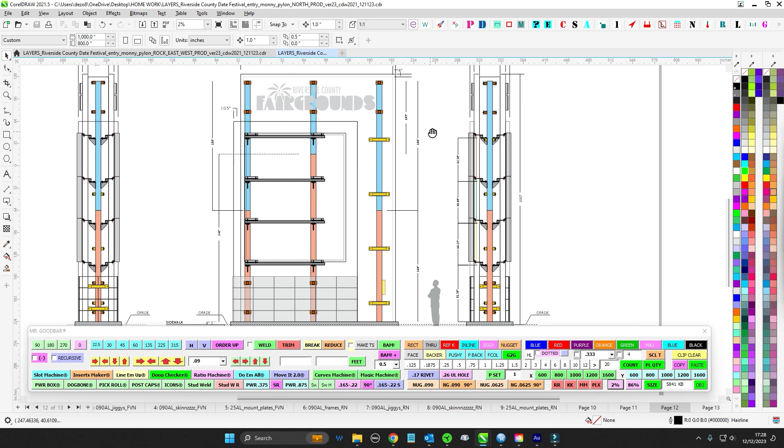It's going to be the fairgrounds, broken up into several chunks. The main thing to know is that we've got some stonework on the bottom, and it's going to be broken up into the major boxes.

So what I've got here is the OG, the old busted version. You can see where this is going away, and we're going to be adding - you can see where the blue is. We're adding more posts there, and the tan, peachish color is the existing poles, you can see where they fit in. So it's going to become quite large.

So what I wanted to do is just give you the lay of the land.

Right now this is 111. 111 is laid out almost perfectly east-west. So what you've got here is the north side, facing Yucca. This side facing this way is going to be facing west - this is the west side face, facing Palm Springs. The other side is the east, facing Arizona, and then the south.

Now there really isn't anything on the south other than access doors. On this pole is where the electrical already is, so they're going to keep that, but we're just extending the pole up, keeping all the stuff there for the new displays and everything. So just keep in mind what I'm calling out and what faces which way.

North faces the street, south faces the parking lot or entrance, and west faces this way. I pretty much started on the west - that was what was given to me. So organically, this is the west side that faces. So that's the layout of how this is all laid out and which way faces what - more for install, but you guys can keep in mind what it looks like over there.

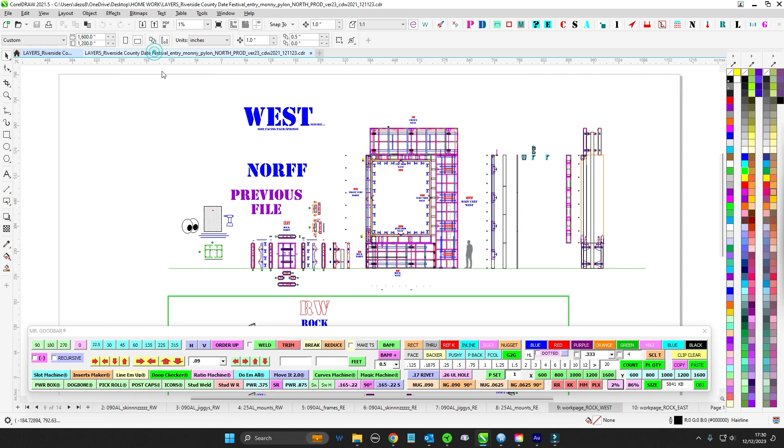So let's show you where we're starting. We have basically a surround that's going around the TV screens, and then it's just going to be panels here, and then there's stonework down at the bottom - well, I'm calling it rock. It's going to be cultured stone, but I just call it rock because 'S' gets confusing, so I call it 'R'.

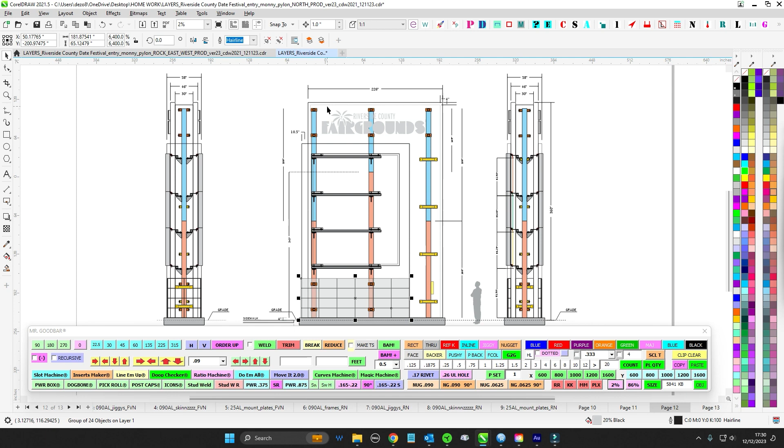So there's rock down here, and then there's the surround, and then there's the panels, and then there's the letters. You can see the side views and stuff like that. So that's where this kind of started.

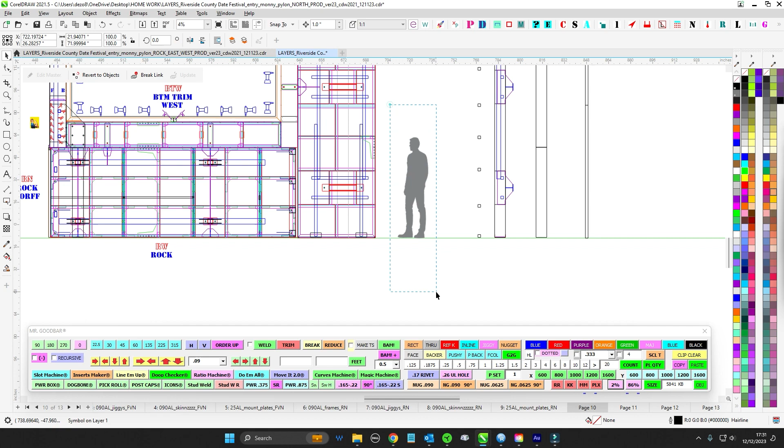And then I realized that I'm at 1800 right now - 1800 inches is the maximum file size you can use at 1-to-1 scale in Corel. So I quickly realized that - yes, you can see, Harold or Hank, whatever his name is - this thing's pretty big.

So what I did is I broke it apart into 14 different sections - 8 of those are essentially monument signs that are really skinny, and 6 of those are cabinets that create that surround. So I'll show you how it's laid out, so you can get an idea what's up. The top panel, I'm going to call that the crown.

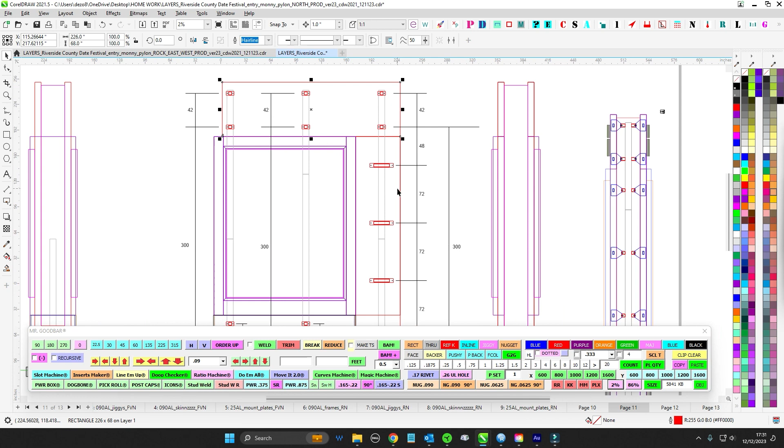And then there's the east and west, because there's one facing this way and one facing that way. There's the main vertical here that runs all the way down. There's 2 of those. And then I'm calling these, like I said, the rock. You have the front facing rock, and then you have the east and the west rock. Those are 3 panels that wrap. And then you have this one here is the main panel.

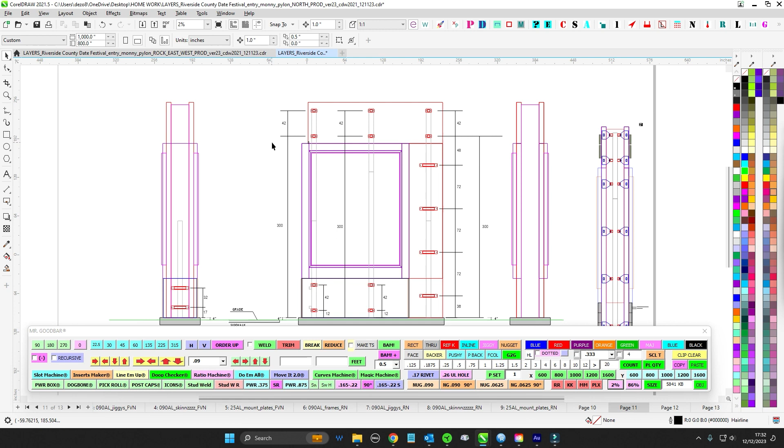This is called the front vertical north or something like that, I forget. But anyway, so that right there makes up the whole front of the sign, and it kind of ties in the surrounds. Then you're left with basically 6 boxes, 3 per side, little cabinets. And those will be like the surround that surrounds the TV screen area. So this is where the screens are.

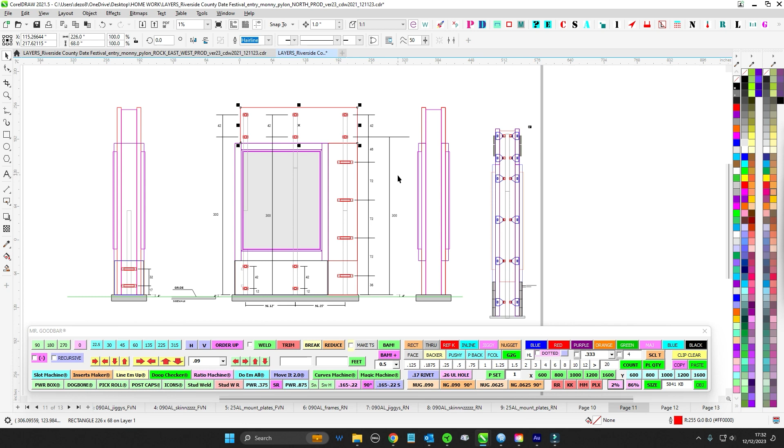So other than the fact that all of these need to connect to each other, that's really the challenge. But if I were to give you essentially 8 monument signs that are pretty skinny and only have faces on one side, you'd be like, cool, I know you guys can knock these out. You guys can knock a monument sign out before lunch if you're hopping. So as far as being intimidated by how big the sign is, really you're just going to be cranking out a lot of cabinets, and you guys are really good at that.

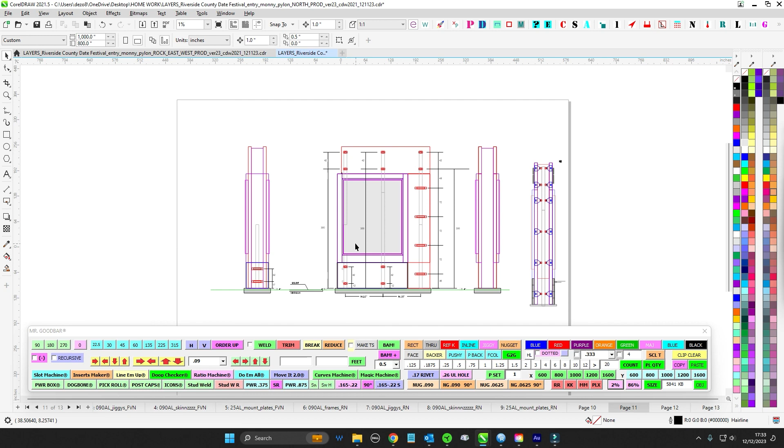And then you're going to have these 6 little skinny cabinets, and these won't even have jigs. We're going to go jigless design on that just to make it easy, keep it lightweight. But I mean, this right here is over 12 feet, so it's still big. This is going to be 16 feet, whatever it is. So it's just the scope, it's just the size of things. That's all.

So anyway, that way you kind of get an idea. Let's go ahead and take a look at that. So like I said, we got crown, so I'm calling that CW. I'm going to break this cabinet here into crown, west and east. I'm calling this the main vert west, so that's going to be this whole guy here. You're going to build this into one big old panel there.

And then, like I said, I've got the rock west, which is this guy, and the rock east. Those I've already sent. And then you have the rock north, which is this little panel here. But all of these connect to each other. First and foremost, these panels get attached to the poles. And then rock north actually attaches to the poles, but also is going to tie into its buddy panels to create that wraparound for the rock.

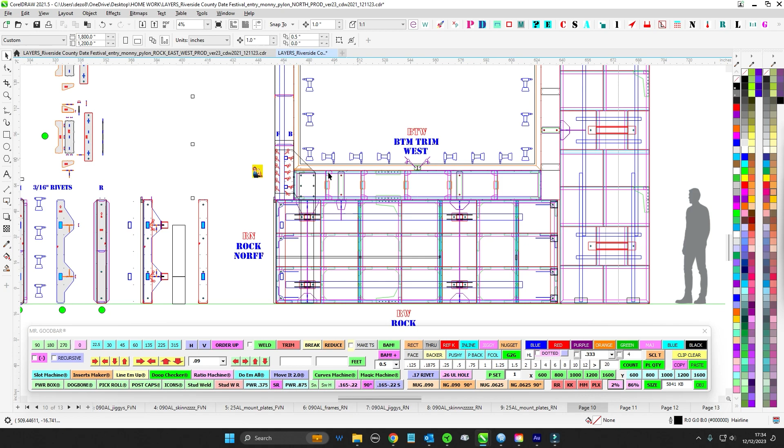And then once those are in, really the last thing - ironically, the first thing I sent will probably be the last thing that installs - is this whole front part here, which I call the front vert north. So it's essentially one big long box that is going to be lifted into place, and then it's going to bolt in and hang off of crown west here, and it's going to nestle in and get attached to rock west and east, and that'll be its attachment point. So it kind of just floats there because we didn't really have a contingency plan for attaching it to the actual pole itself, because we didn't know what was happening with the TVs. So I think it'll be okay if this just floats, but it's going to tie into this. So it was beyond that pole anyway, so it's not really a big deal.

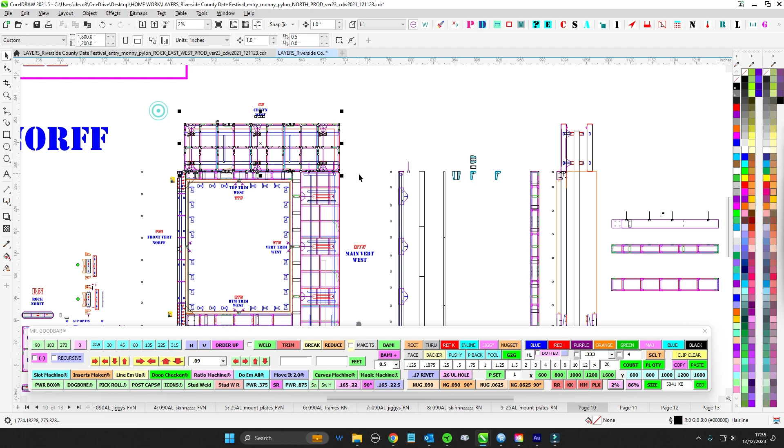So that's kind of how it's going to be broken down for you guys. Right now, like I said, I've already got these 3 out to you, wraparound plus the front, good to go. It just kind of depends, but I'll probably start working on this guy and get these 2 out to you, and then work on this. I'm giving - this gives RNS time to give us the pattern before I do the letter holes and stuff. Maybe I can put the holes up there, whatever.

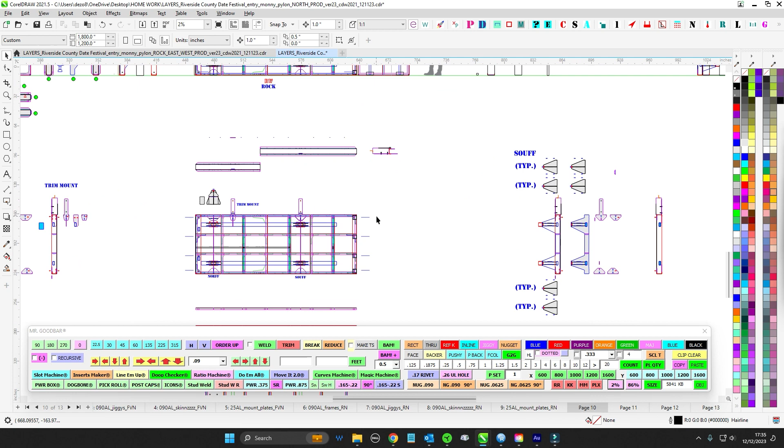So basically that's it, that's kind of like the scope of work, that's kind of how it's all laid out. And again, really, I'd be confident that you guys could kind of figure out what it is. I don't really need to hold your hand on a lot of this, but I'm just going to point out some of the stuff just so that way you can kind of know what's up.

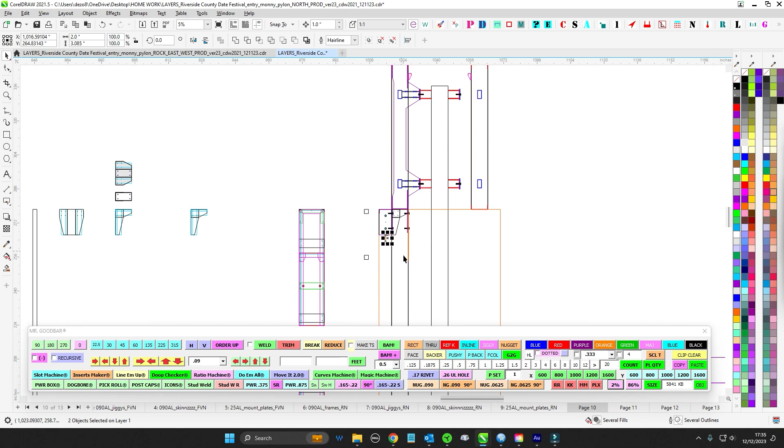And like I said, I'll still give you a heads up on stuff as I send parts. So as a side view, all the way around, it's going to have this 3x2 track you're going to bend up, and that's going to get riveted all the way around to the different boxes.

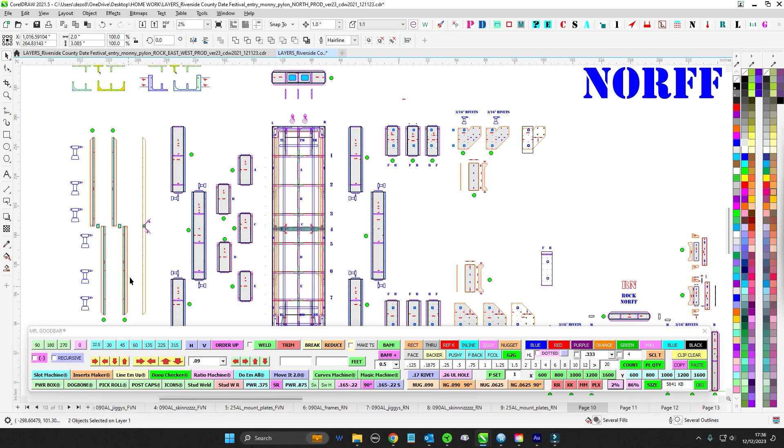So when I create this box, it's going to have mounting provisions all the way. You'll see that's what this is all about. So on both sides of this guy, you can see the orange with the dots there. That's going to be these fins. I call them deco fins, decorative fins. So you're just going to make those, and they're going to get riveted to the inside. So all of these boxes, yeah, that's what I'm saying.

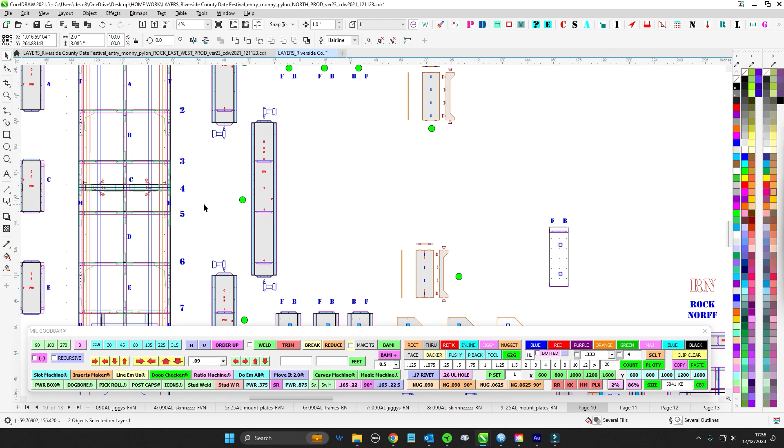This thing's really tough. When it's at 1800, I'm jumping all around, forgive me. But you'll have it on this box here, on top of this box here, and on this side box here. And then, like I say, you'll have it on that. But otherwise, really, this stuff is kind of stuff you've already seen, so there's not a whole lot to get into on that.

But that being said, let's get after it. Let's talk about, let's focus on north right now and what I've sent you. So let's talk about the lay of the land. Let's see, you know what, I need a page turner for this. Boom, page turner. So we've got all the frames.

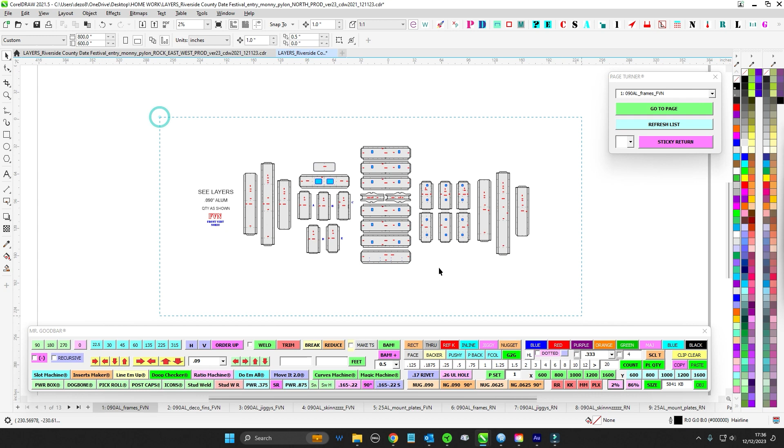I already saw these little pieces right here. These are pretty identical, so those were already routed. So you guys have already chewed through that. You'll have your fins and you'll have all the jiggies. Unfortunately, it is asymmetric, so you have a C-channel face seam here that you don't have in the back. And then also, like I said, everything has to bolt to itself, to its buddy.

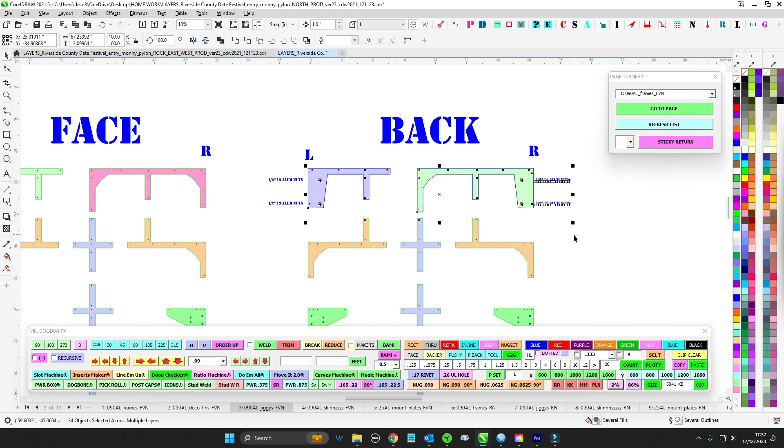You're going to have a lot of this where you're going to have some half inch by 13 nuts that are going to weld into the 090. So keep that in mind. Look for those as you're building.

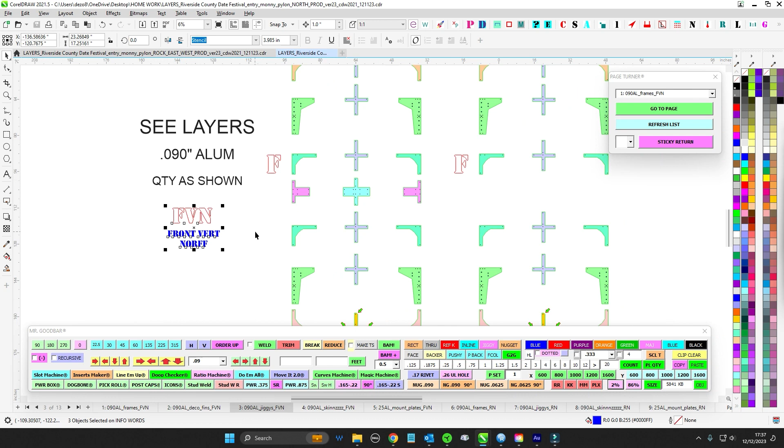Also, I tried to keep the reference kitting to a minimum because there's so much to do, but I think it's necessary because there's so many parts. But try to keep all of these binned, because I didn't really put anything on here, and they're pretty much specific to each thing. I'm trying to copy them and save time, but I wouldn't bet that this jig here fits any other. So make sure you're keeping track of the Foxtrot, Victor, November stuff here. Keep that in a bin, try to keep it all together.

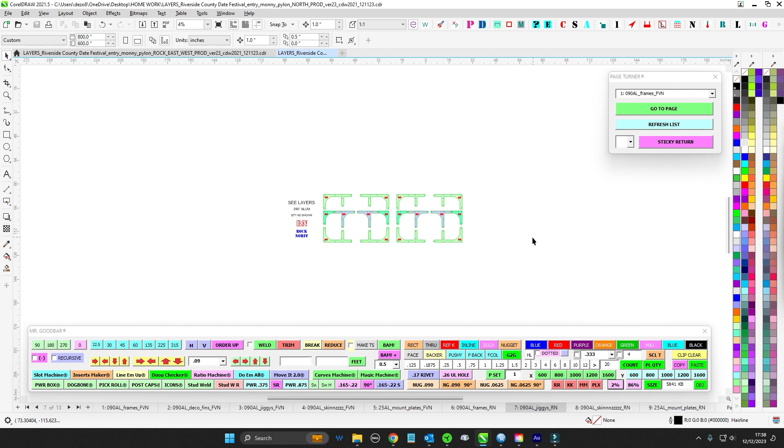Skins are pretty obvious, mount plates are pretty obvious. And so then, because I was kind of doing north and this wasn't too huge, I went ahead and did the north rock frame. So the rock frame is really simple, it's almost less than 6 inches wide, and it's just going to be a quick little bad boy here. So you've got the frames there, you've got some quick jiggies, and you have the skin only on the front because these are just supporting rock, and you'll have your jiggies there.

So let's talk about the North Vert. Really, there's nothing to talk about. Like I'm saying, you guys are going to do, I think, pretty good work on these because they're just big boxes, you guys are used to that. You're going to skewer, this is 2x3.

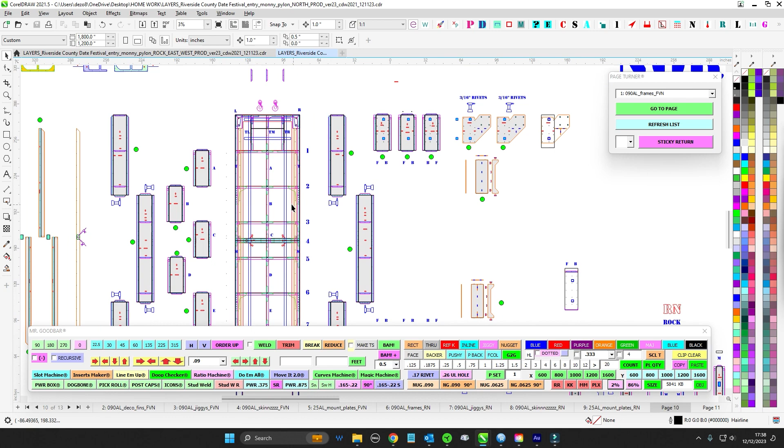Let's talk about the cut list. I've got 2x3 and I got 2x4. The 2x4s are going to be for the horizontal supports because they have to put up with the weight of itself, kind of torsion, and when you lift it, this is the lift point, it's going to be kind of wanting to sag down or whatever.

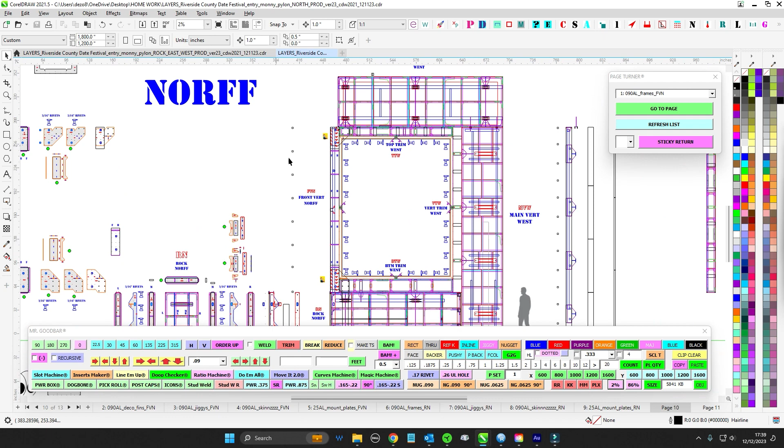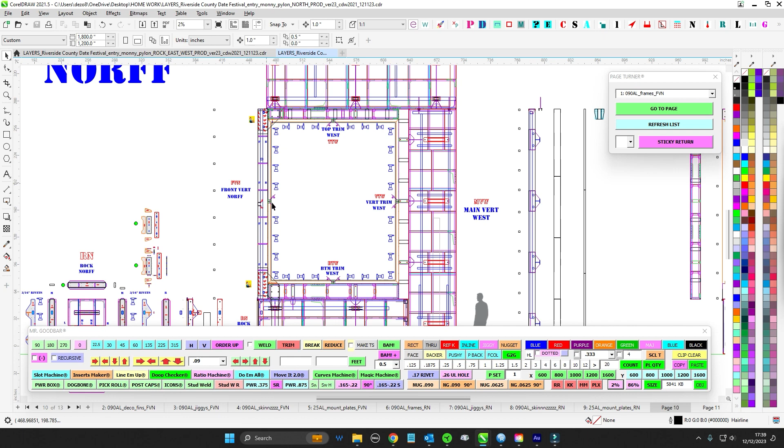But on the stuff that's vertical, I went ahead and just to save weight, I'm going to do 2x3 on these. Really, the only problem they'll have is when they're actually horizontal. And then when you go to lift at the end, while it's only at 10 degrees, it's got to support its own weight. But once it gets vertical, then these sticks really aren't doing much. They're going to be in tension, but there's not really much necessary. But when you've got these guys, when you've got a box like this and you're going to be lifting it here and here, you got sag.

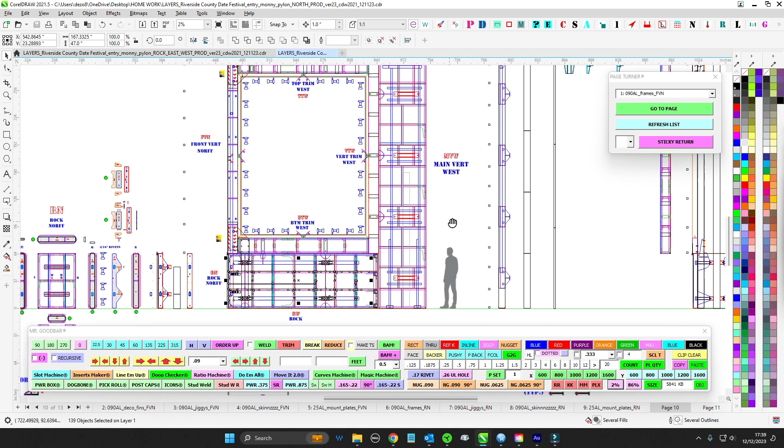So you want that strength. Same thing here. We're doing 2x4 on the rock surrounds, rock west, east, and north. So you want to bring in a bunch of 2x4, so at least 10 sticks of 2x3. And I'd bring in another 8 sticks of 2x4. Of course, we'll use it.

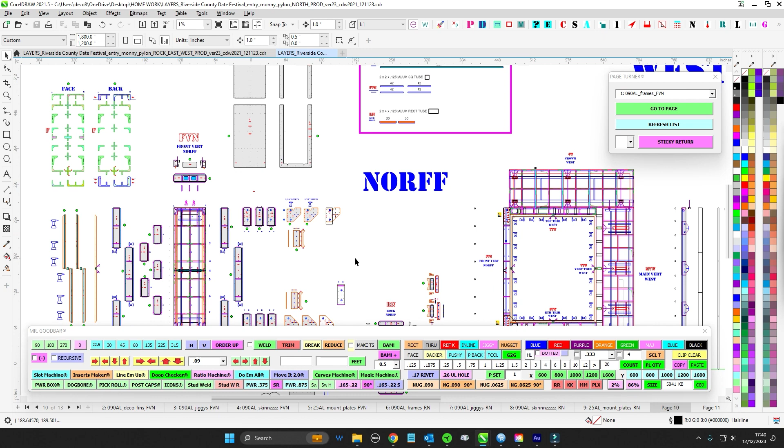So bring it in. But anyway, for north though, really that's it. You're going to make this box. The only thing I want to point out is you're going to do something like you just did with Eisenhower, you're going to rivet the mount plates to the inside structures here. And then that's going to allow you to reference them in. So you can see where the 1/4 inch plate goes to the outside of this strut and it goes the outside there. And then that allows this long boy here to skewer through, and you're going to have the entire 2x3 going along here to weld.

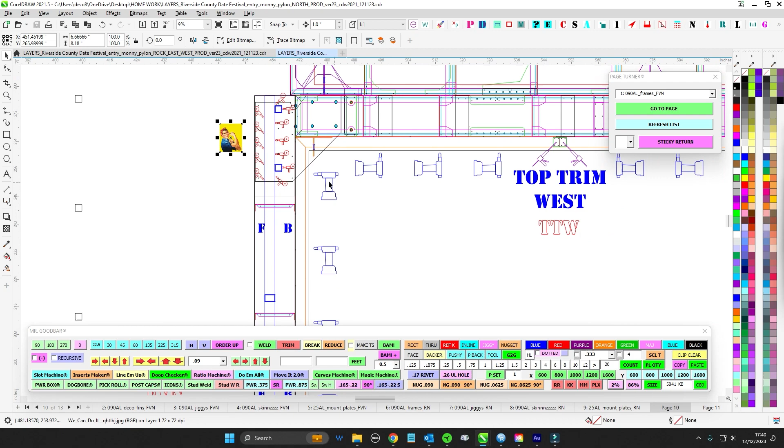Now, of course, please don't weld the entire thing. That's not needed, but give it some really good welds because this is supporting the weight of this cabinet here, and then it's going to support the whole weight down here. Of course, it's not going to weigh more than a few hundred pounds. It's fine, but we're going to be in these 1/2 inch bolts. It's not going anywhere. So you're going to skewer through, but you'll have your crosses and you can do some good burning.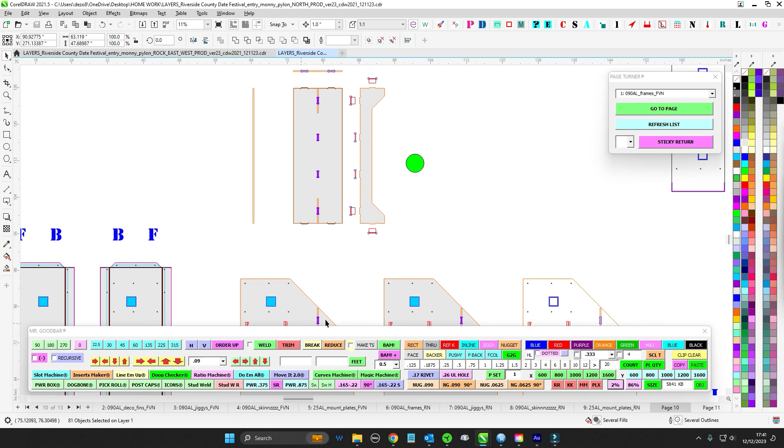But that's it. 3/16 rivets to these struts, top and bottom. You have some in-between struts. You can see where this guy here is this little vert there, and this guy here is there. Just don't get ahead of yourself. You'll have to sandwich these in. So you'll rivet these to these guys. And then before you cleco these into place, you'll have to put these braces in across each one, so that way they fit in. And then you can cleco it together and then do your skewer and all that.

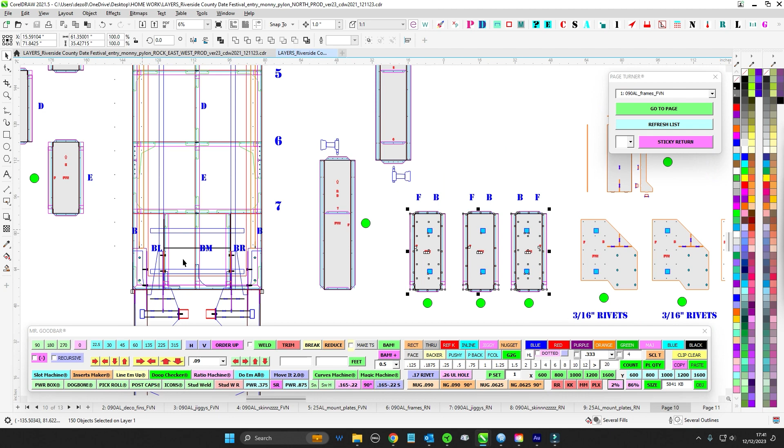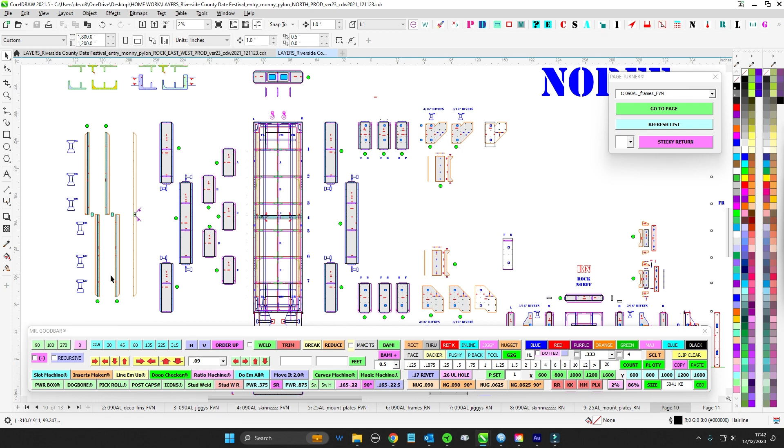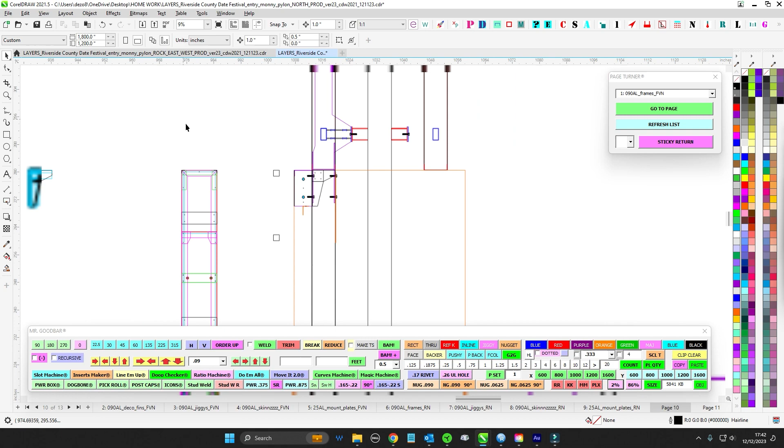You've got the flange to the back, and then that puts us right at that sweet 3 inch apart right there that they want, and then the screens will be 1 inch down. So the TV screens will be like right there. So you should be good to go. Anyway, so that's it for the north box, for this vertical north box.

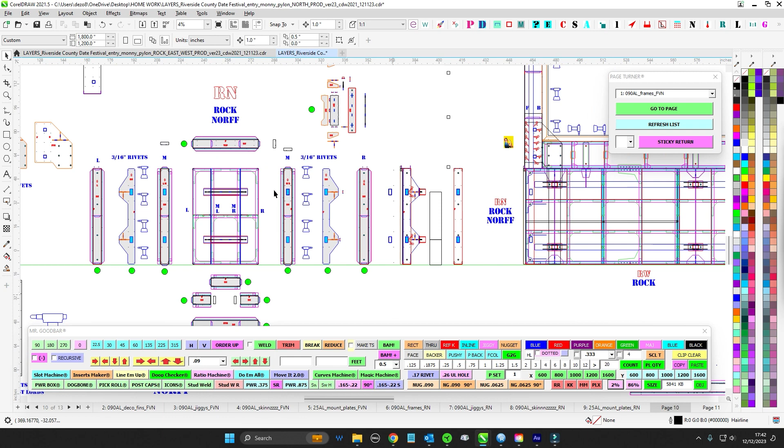And then kind of the same thing for the north rock, I kind of overdid the bracing on these guys a little bit more because they have to hold the stone. But kind of the same thing. You're just going to make your frame. You're going to do your skewers. And I have 3/16 rivets. Same thing. You're going to take this little guy here and rivet it to this structure. It's on the outside there. And then that allows you to get it in place. But you have some in-between guys here. Make sure those get inside there and they're going to get trapped in between each runner.

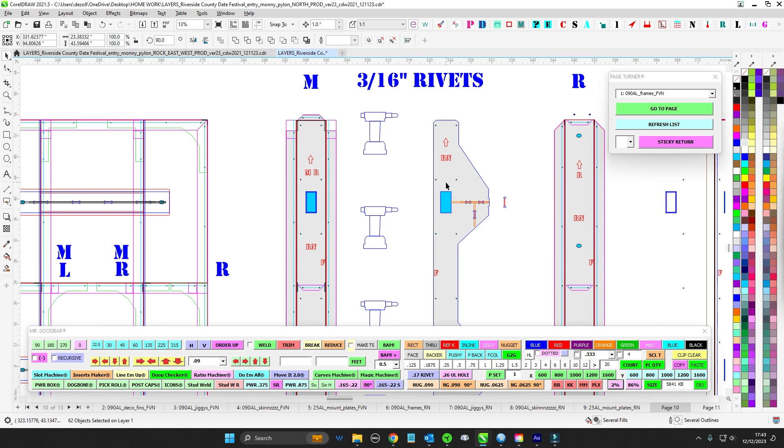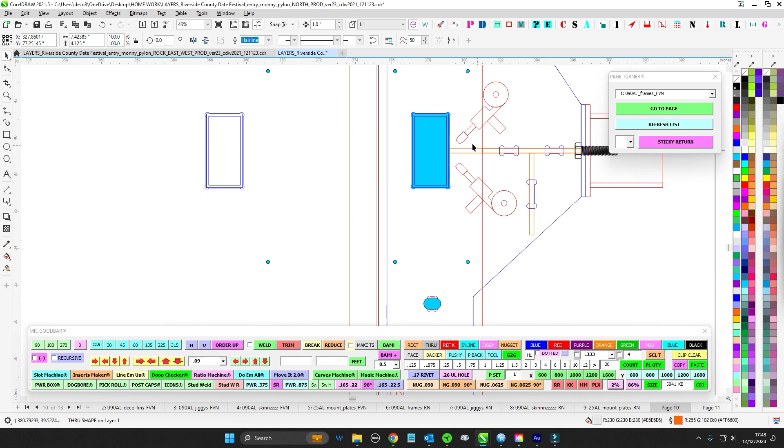Now on this guy, I went ahead and made provisions, and this is going to go forward. You're going to see this on the east and west as well, that these fins right here will mate up against the 2x4. And so that allows you to bring this little stick right here to the 2x4 and give it that strength. And that way you can burn it. Yeah, you can see right there. This little guy is going to make it back here. And so you're going to burn that to the 2x4. And then that ties that stick into this, and then it goes right to the steel pole.

And then that's going to transfer the weight of our stone. But like I said, there's not much here that you haven't seen before. So really good. But going forward on the stone stuff, not so much this. If you want to throw like a safety rivet or whatever into the faces of these, that's fine. These just need to support themselves.

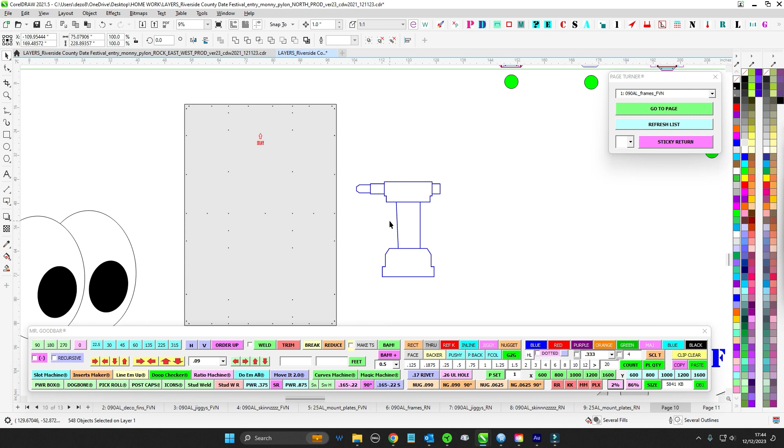Great. But for these 3 stone, the bottom stone area, let's safety these off, because really, Lord's the crud out of them, and then throw in some countersink safety rivets, because this has to hold the stone up. So we don't want to just rely purely on Lord's and whether or not the stonemason's going to hit studs with his backer board.

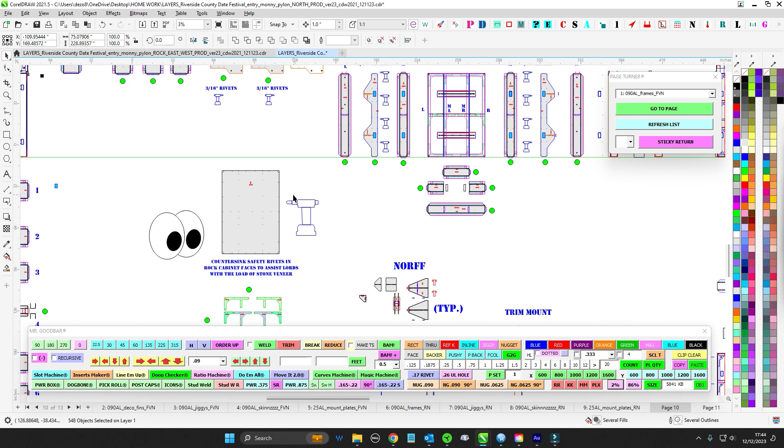So let's make sure that you get some good mechanical backup, or even if you want to countersink and do countersink screws, either way, it doesn't have to be rivets, whatever is easiest, but countersink. And let's give some safety mechanical to this. So that's the north box, and that's going to be the north rock.

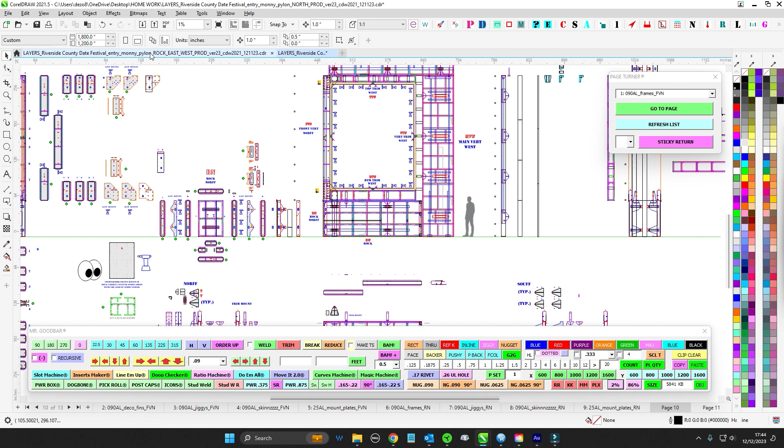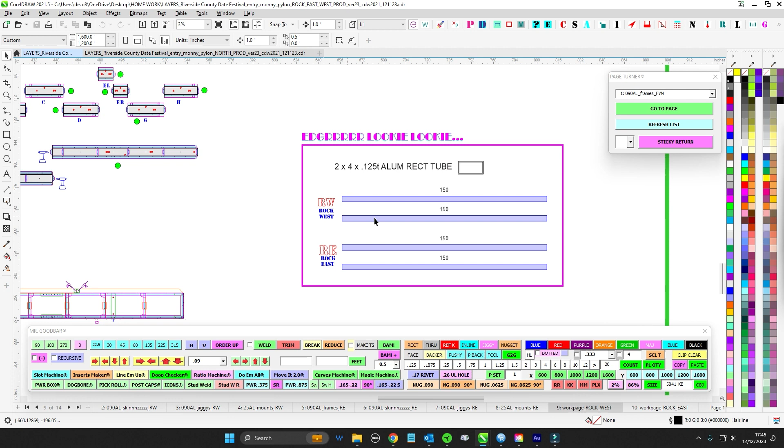So that's it there. So let's cross over to the east and the west rock, which is just more of the same of your north, except when you open up your PDF, because it's so big, we're working down here. I went ahead and put a green box around what you need to pay attention to. So you have your west and you have your east. You got your cut list down here. This is going to be 2x4. So you're going to bring in more of that, and it's just going to be square. Again, you're going to be building this frame, nothing too crazy.

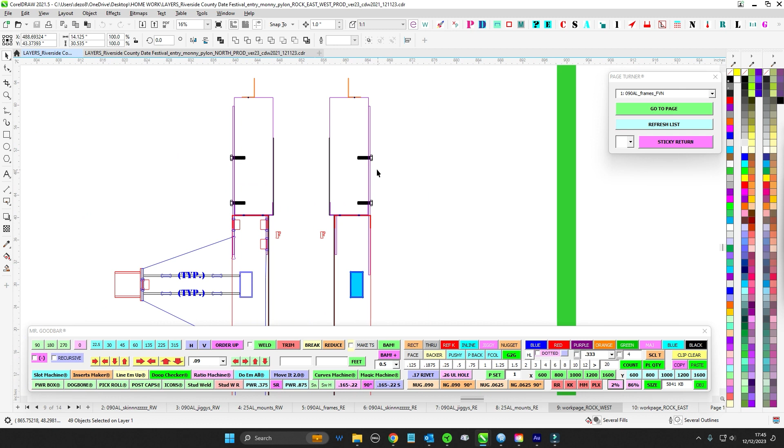Now you're going to start seeing how things are going to mount to other things. So you're going to be doing these mounts to the back side of this box, and that is how these decorative boxes are going to mount with 1/2-inch hardware. So this box is going to sit on top of this box and go through. You see the purple there? That's going to be these guys sticking up, these middle fingers. They're going to be sticking up out through the frame, ready to take those box mounts here. So you can see that's right there, right there, right there, right there. You're going to be seeing those tie into this.

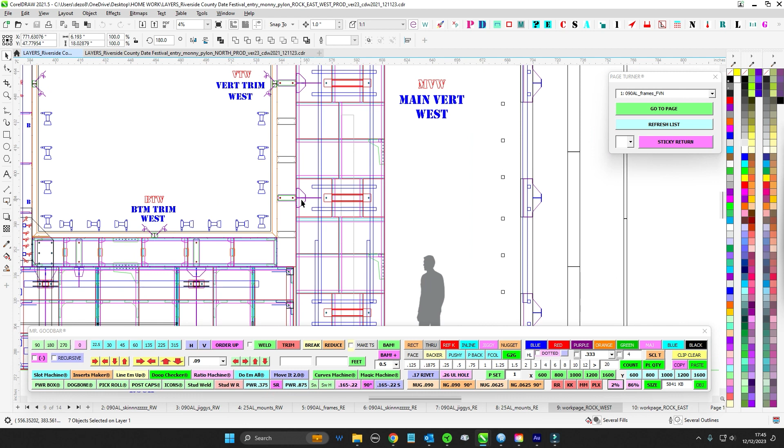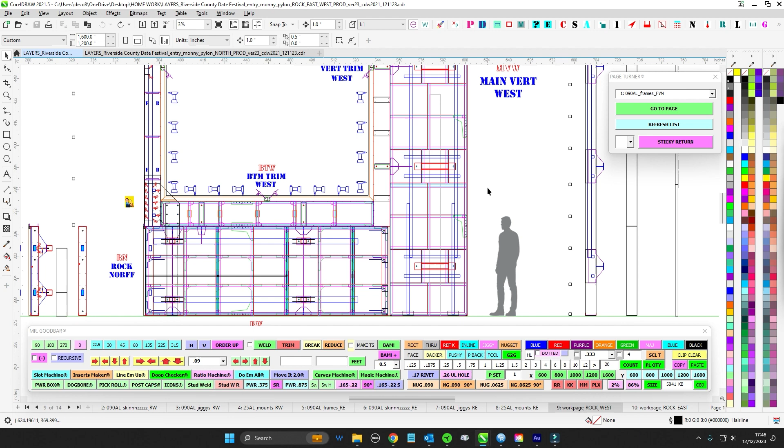You can see where I'm transferring the load of this box over to where it goes to the pole, and then same thing here. So you're going to be seeing more of these mounts as you go, and there's going to be some on the bottom of the crown boxes as well right here. So that's the main challenge, figuring out how to transfer mounting systems to each of these.

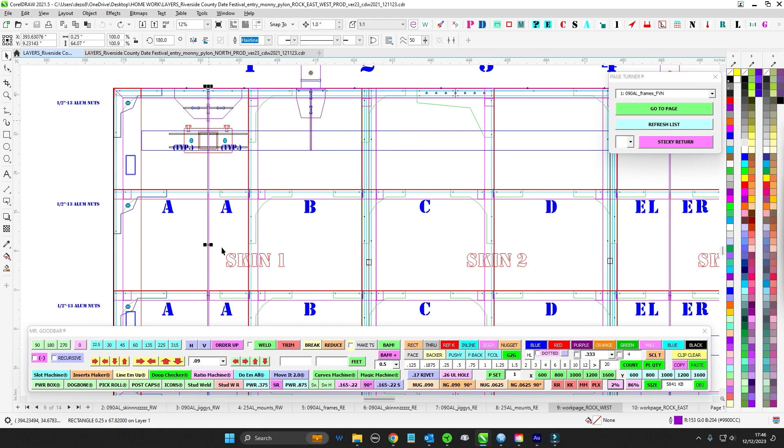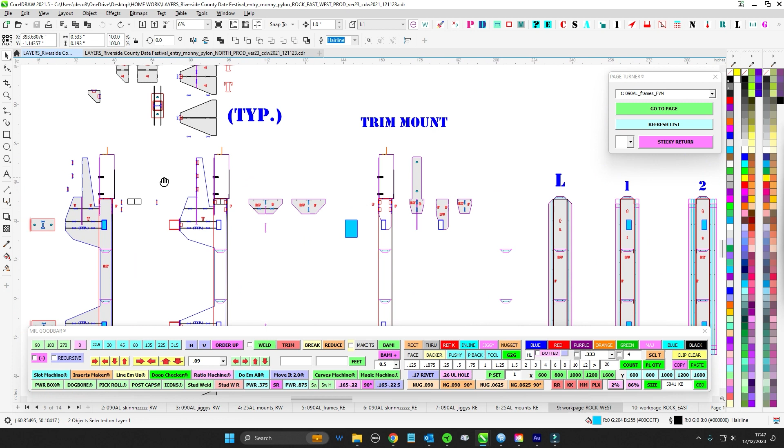And then you're going to have this. Now, I would say for these guys here, this is the most tricky of all of them, because this is the bottom mount. And so I wanted to transfer the load of all this guy coming down and getting him down to this main mount unit here. So you're going to have this unicorn rhino looking thing.

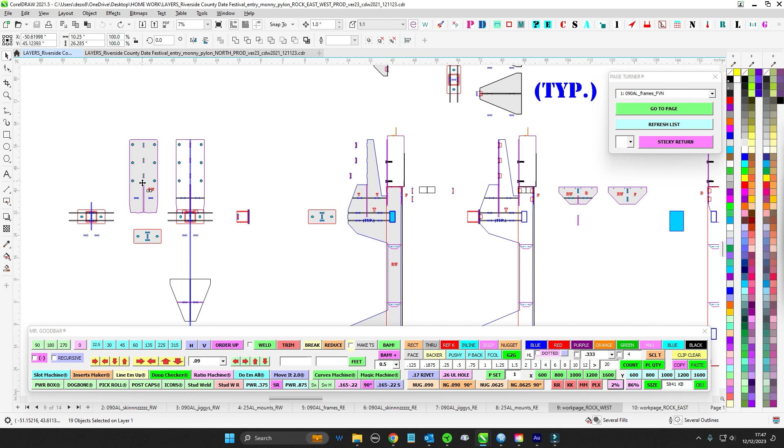It's a little bit of a puzzle putting together, but I think what you're going to want to do is start with this plate, and then this plate just comes home right there, and it slides right down. Then you'll start packing in other plates. So these little plates here fit right in there in between, right? And then you'll have these front plates that go right in here. See where it says TTT, that's all here. So these guys go there.

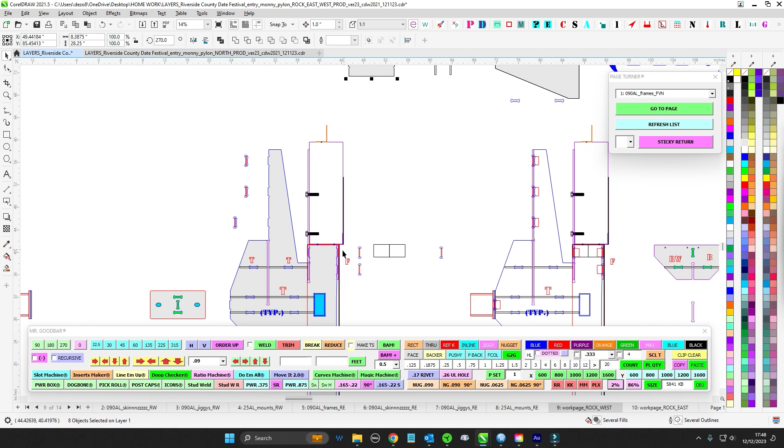And then you're going to have this top, right? This says T here. It's going to have two grooves. That's this guy. So you can see when you slide this long plate down, it's got two dog bones there that are going to tie into that top plate. So that's the top plate there, and it goes all the way back.

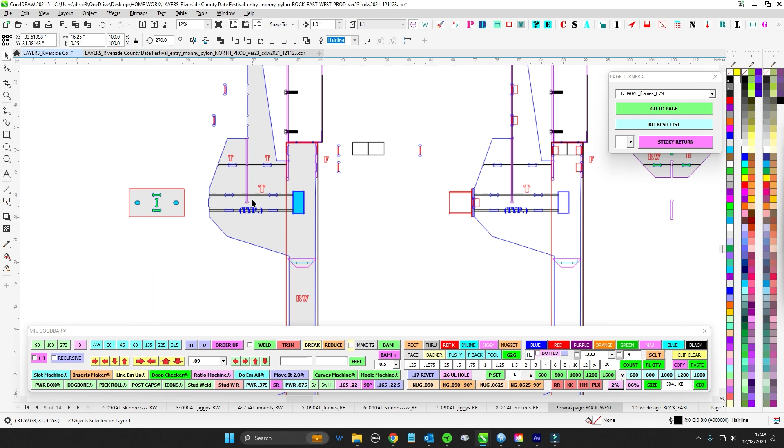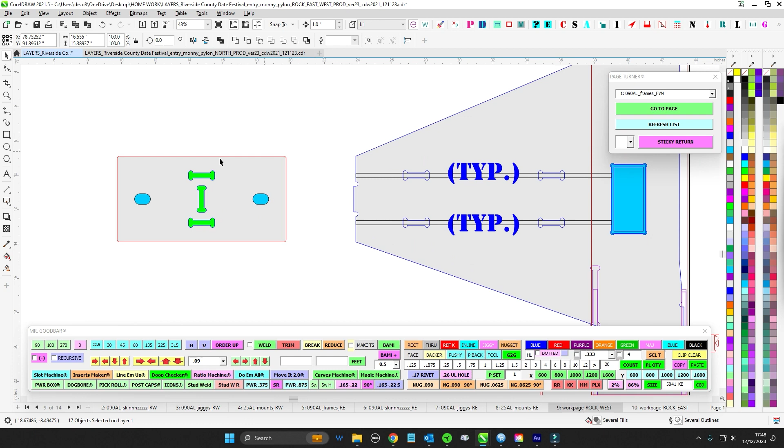Like the other one, you can burn it to the 2.5 there, or the 2x4. So you can see this plate is going to slide right in, clunk. And then where those dog bones go is where that goes. And then the rest of them are typical. The rest are just going to go there all the way back. And then you have two here and two here. And then those tie into the main pad that actually mounts to the steel. So the red here is the steel.

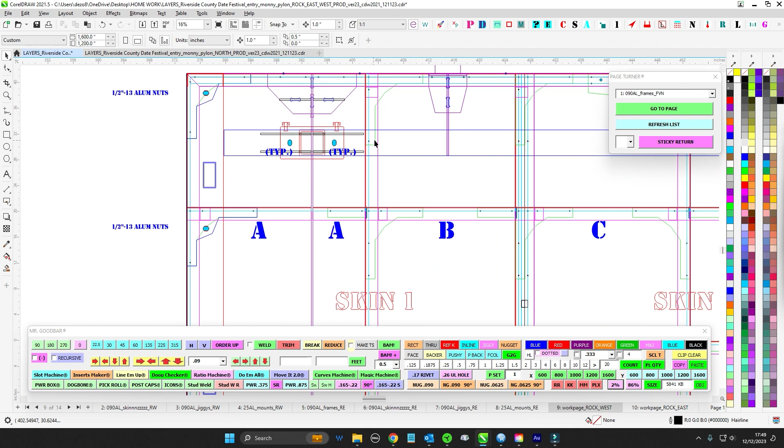So that's the strut there that triangles out like that. That way they have access to get to the bolts. So they die out early. Excuse me while I jump around. So you can see this is where that triangle starts, and then it gets long and goes all the way out to here. And that's where you're going to burn it against the 2x4. But it dies out here. So when you reach your hand in, they'll have the ability to get to this bolt without those struts being in the way. So there's plenty of access right there. So anyway, that's pretty much it.

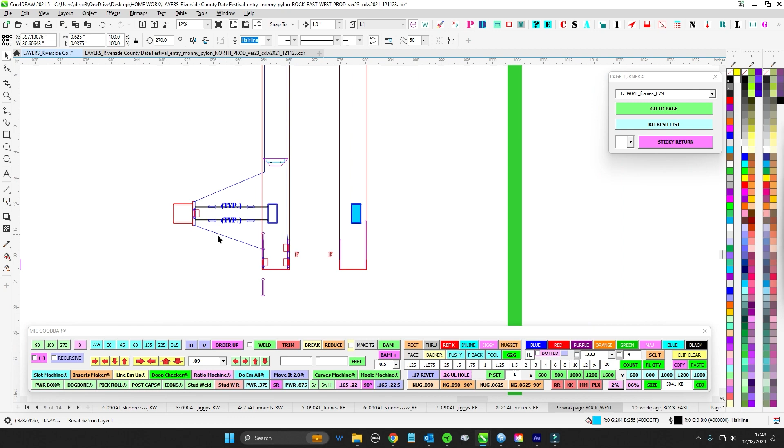The south side that faces the parking lot obviously only has a single guy that goes up like that. And then it just has the same kind of system, but these are just more typical. So you're just going to put that strut, and put that guy and notch it in, and put that guy and notch it in. And then you can use this guy to burn to the 2x4, and then just burn it up real good. Again, I don't think you want to burn the whole thing, but make sure it's on there good. Do a nice 2-inch right here, and maybe a 2-inch here, and a 1-inch there and a 1-inch there. You don't need to go too crazy, but we want to make sure it's strong.

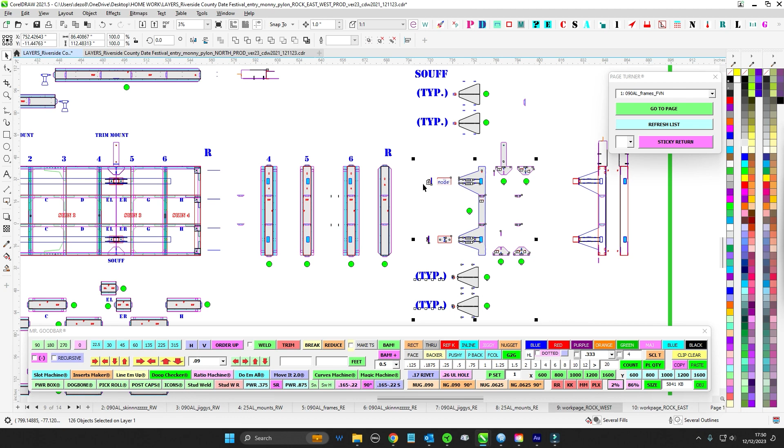But that's it for that. You just got to do that south side. You have a single trim mount all by itself that's next to the north. And then the north facing one is this one on steroids to help accommodate the mounts for the big old trim box. So good luck on that. Just kind of think it through. If there is something that doesn't fit and it's easier to grind the dog bones off, just make sure it lines up okay. But I think I got it figured out for you guys.

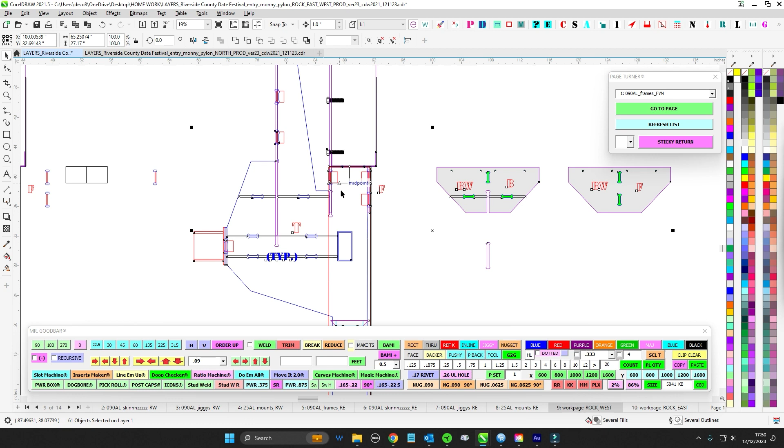But if not, you'll probably end up having to put all of this together, maybe with light tacks or something, and then sliding the frame down over it, and then clecoing it in after you've assembled it. I don't think you'll be able to assemble all this with the 09 frame. But anyway, good luck with that, but kind of think it through. But again, that's really it for the weird stuff. Again, I'm talking about this.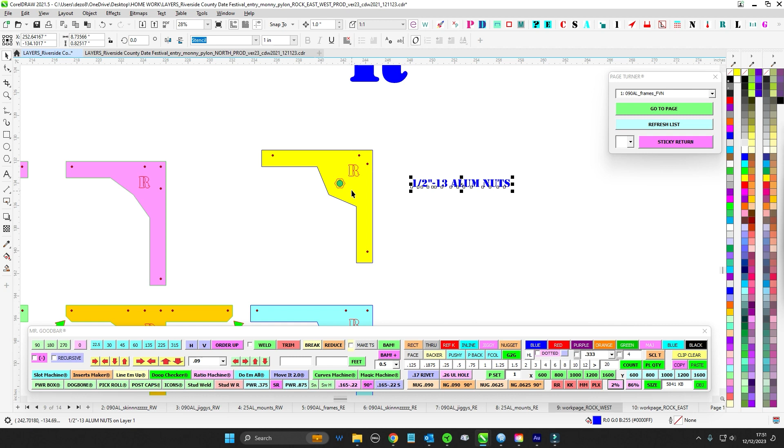You need to do those 1/2-inch 13 aluminum. You're just going to tack them, semi-weld them into the back of the 04 or back of the 09. I did a 045 relief into the island fill, but you're just going to go ahead and just do that. And then coming forward, I'll jump off that bridge when I get to it, but we're going to have a mounting system that's going to make up for this 1.5-inch little gap here, because you have this here and then you have really nothing there.

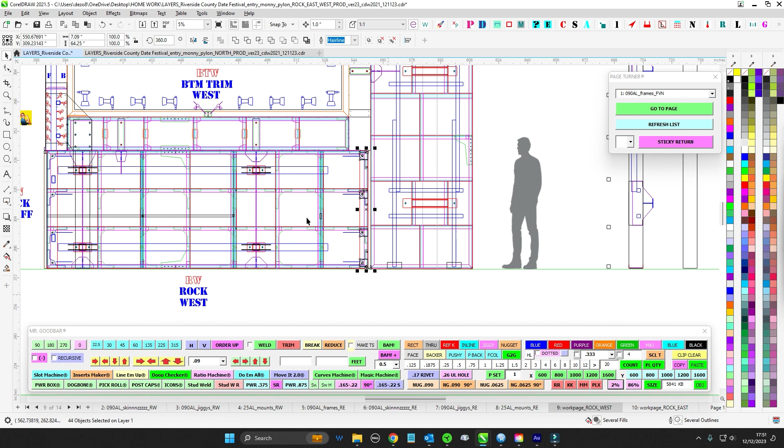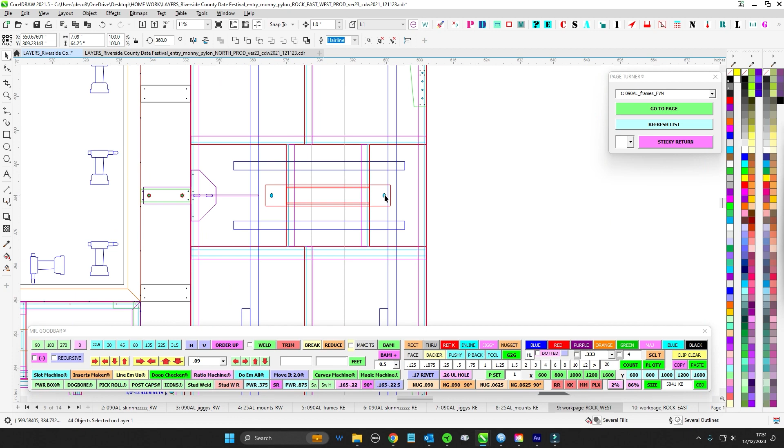So this is going to tie the rock west and the rock east to the main vert west, and the main vert east will tie in with some sort of box that I still have to cook up. But since all of this stuff is being installed with 1/2x13 nuts and bolts right here, we're just going to go ahead and do 1/2x13 weld nuts on everything, or through bolts or whatever. So we're just going to keep it all.

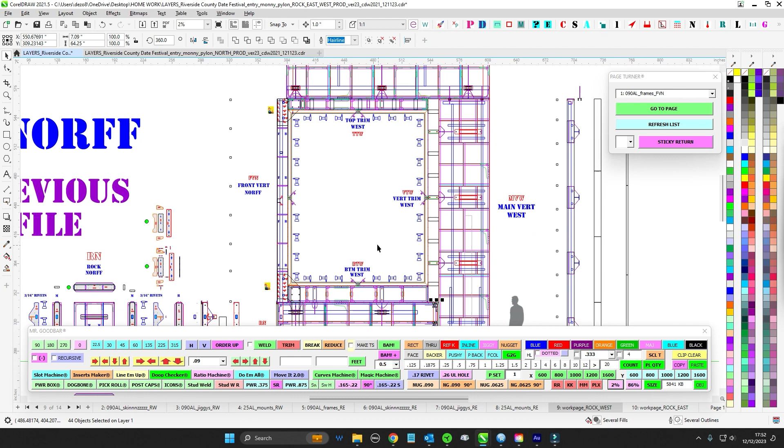So really, I don't foresee any 5/16 steel riv nuts. I don't see that. It's just going to be a whole heck of a lot of number 10 self-tappers for install. And for you guys, it's rivets galore, and bring in a lot of 1/2x13 aluminum nuts to weld up for yourselves. So, but again, not a high LOE. It's just going to be a lot of work.

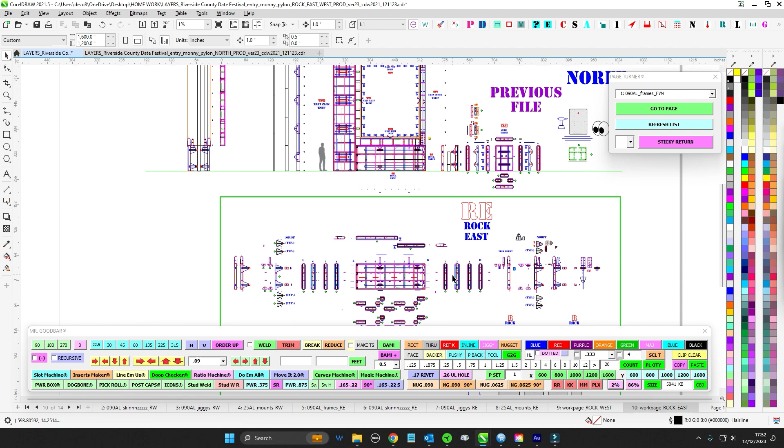So that's pretty much it for this. And the east is just literally the mirror version. So everything I said, it's opposite side because now we're facing Arizona. This side faces Arizona. But essentially everything is a mirror. I think I did a good job of making sure I mirrored everything properly. But once I build the west, you can see here's backwards, I just kind of mirror it and try to make sure everything works. So east would be the one that might have something funky because I mirrored it from the west. So west is first.

Anyway, even though East Coast is better. What? Oh, hip hop wise. Weather wise, West Coast is better.

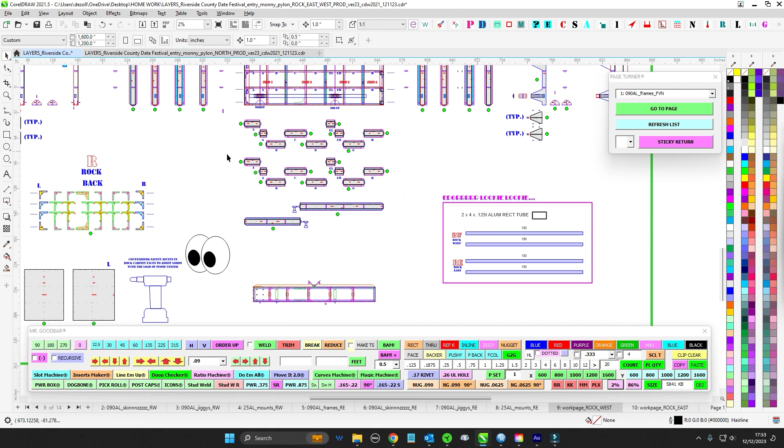But anyway, so that's it. If you have any questions, that's it. I think it's not going to be really difficult. Oh, what I was getting to is that this is a heck of a lot of square footage. So you can see where 2 of these is going to eat up a heck of a lot of the driveway, and you're going to have 2 of these, and 2 of these, so you're really going to have to start thinking it through.

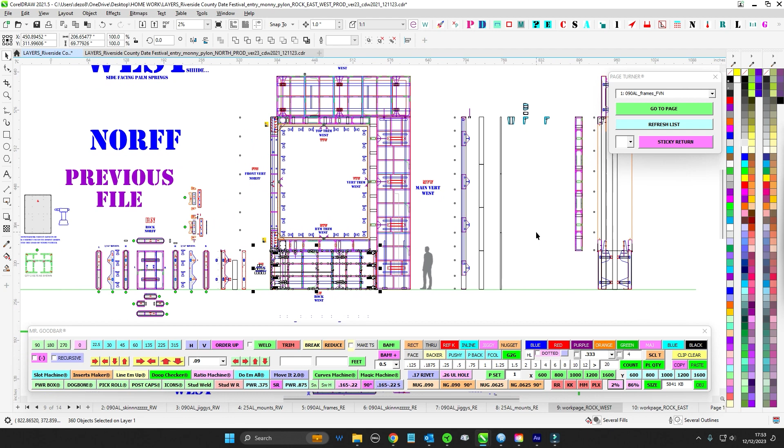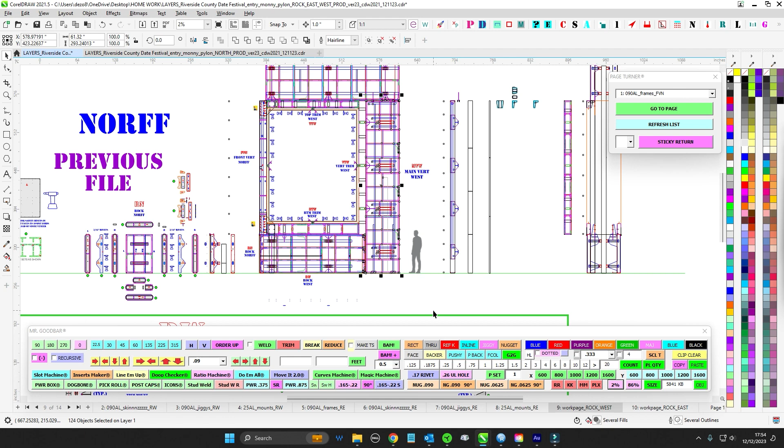Also, if you do build these things on your tables, I know Edgar and Bird have their tables there. If you guys try to build this on your tables, great. But you might consider possibly moving your tables out of the way and creating some sort of system of sawhorses, because you don't want to build this in a way that it gets trapped in the shop either. You know what I mean? So you're going to want to build it over where your tables are and then shove it out Edgar's door, and then build another one and shove it out, and again, think ahead of mobility.

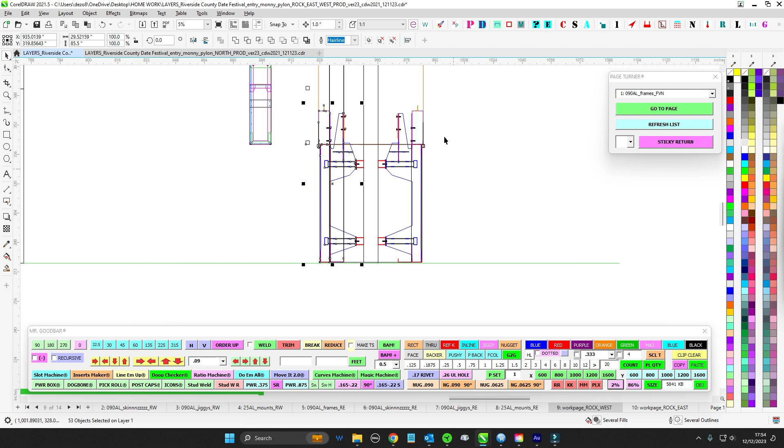What's going to be good is you can see here's the panel for the rocks, that's the rock west there, and then it has the long things that stick out. So these are going to be almost like tables, so they'll be really easy to lay down. You want to make sure you're not putting too much weight on each one, but they'll stack okay, and they'll actually be transportable. Like you can see on the crown, you're going to have these legs sticking out.

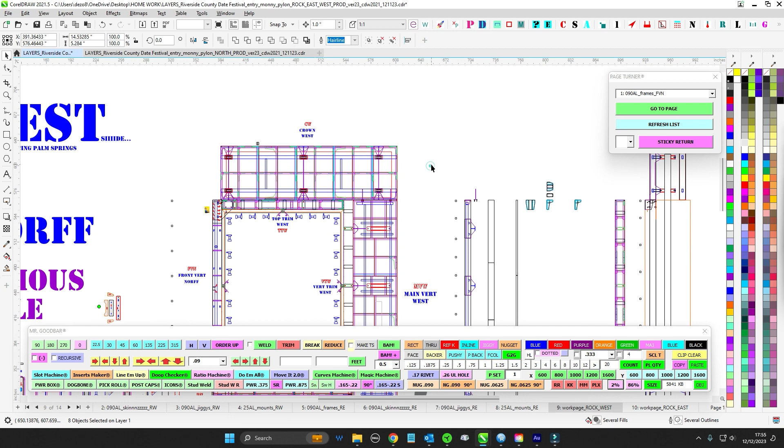So you might want to consider carts already. Maybe get some more carts, make sure you got plenty, and get these things mobile and put carts on each foot like that, and then you can wheel them around. Or we might have to put these vertical and stack them vertically somehow, because just by sheer amount of square footage, we're not gonna have room for all this stuff. So don't trap yourself, don't build it into the shop and then can't get it out, ship in a bottle kind of thing. So just got to think it all through.

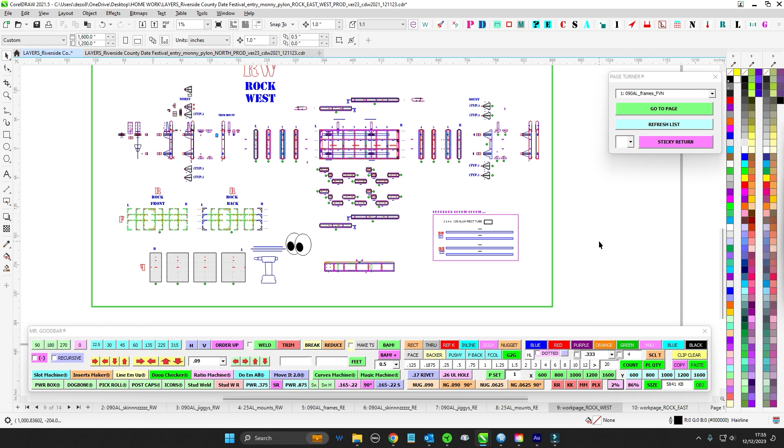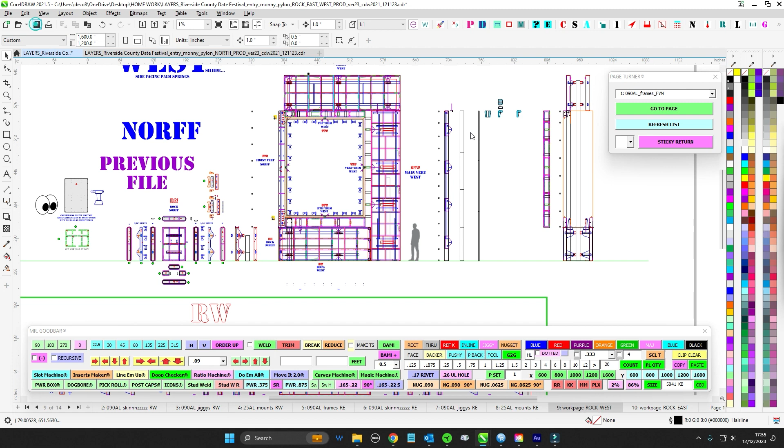But yeah, same thing here, countersink screws for the rock. Same thing for those. So just make sure that the east, west, and north rocks are mechanically backed up with the Lords. All right, so that's it for this. You'll be expecting more cabinets, and I'll be sending a few more videos. Like I say, I'll do a full video for install, how I see it all going together.